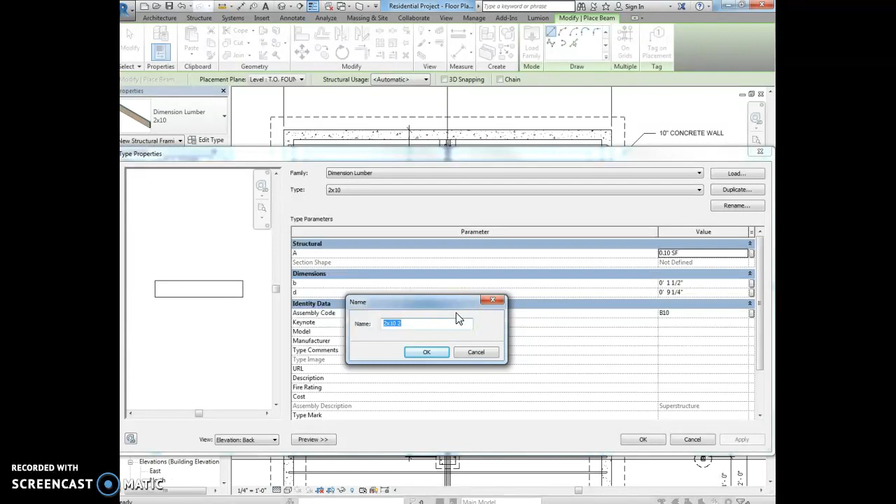Okay, so we're almost there. Now what we need to do is create a sill plate and a rim joist. So we're going to go to beam. We are going to select the 2x10, edit type, duplicate, and rename it 2x8 sill plate. And I know it's a 2x8 sill plate because I looked at the section drawing and it says right here 2x8 sill plate.

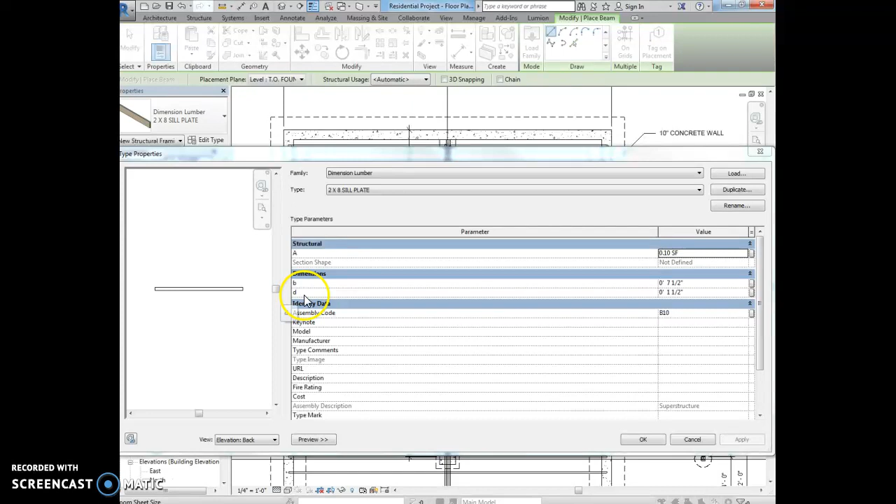Alright, so now to make the sill plate show up properly in the drawing, we have to change the B and D dimensions. So the sill is going to be 7 1/2 by 1.5 inches. Okay, and then we're going to say okay. So this is allowing the sill plate to lay flat instead of putting it vertical.

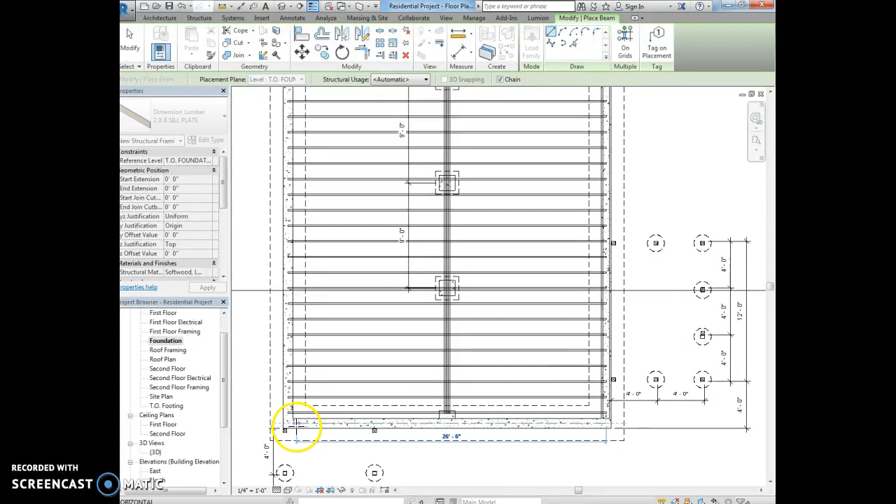Then we have to change the level, so we want it to be attached to top of foundation, and then we are going to draw it on the top of the foundation from here to here, and then I'm actually just going to say chain. Sorry, let's do that again. Delete that one. Do it one more time. Beam, sill plate, chain, top of foundation. We're going to just click all the way around this foundation wall for our sill plate.

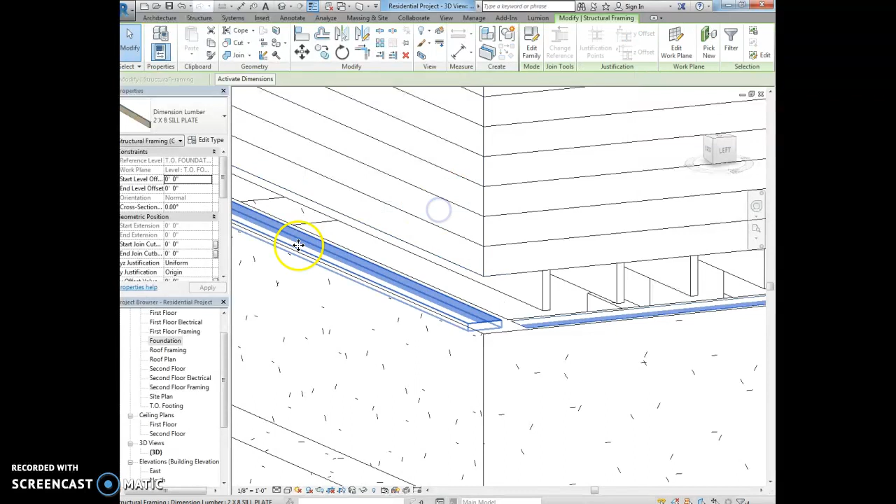Okay, and now we're going to look at it in 3D. So a little bit of a problem here is that it's down inside of the wall, so we need to raise it up. So click on one, right click, select all instances in entire project, and then we're just going to change the start level offset to 1.5 inches, and we're going to change the end level offset to 1.5 inches, and hit apply, and then that pushes them up.

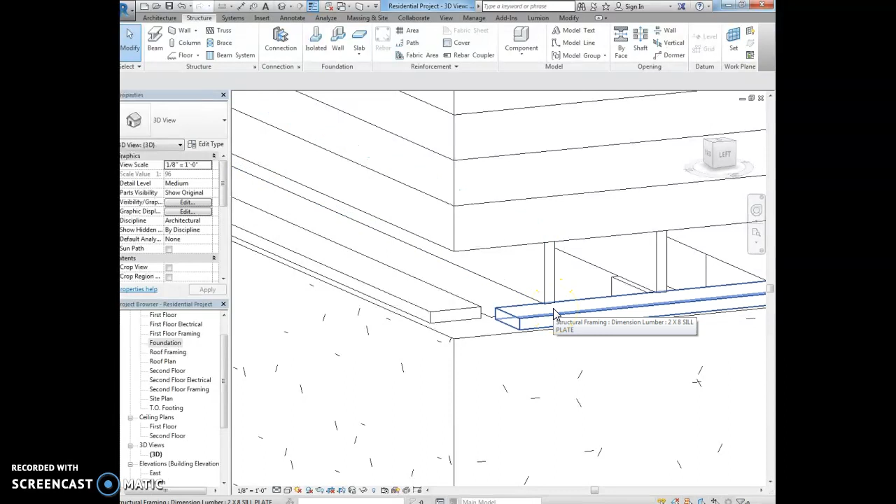So now you can see that things are working out properly. Here's the sill plate, and then we've got our joists, and they're sitting on top of that sill plate, which is exactly what is shown on our section view. We're going to go back to the foundation plan, and we're going to see if we can't get these to connect a little bit better.

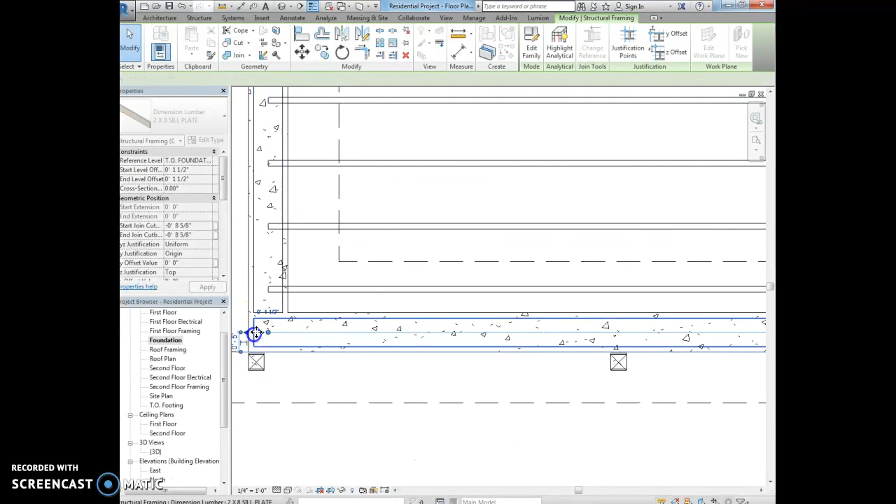Okay, so what we'll do is we will just grab the end of it and use this arrow. We're going to pull it over, and then we're going to use the arrow and pull it up. Those will make all those sill plates connect, and we're going to do the same thing down here. Click on the sill plate, pull it over, click on this sill plate, use the arrow to pull it down to connect. And then, of course, we're going to look at it in 3D, because we have to make sure we did it right. Yes, that looks fine.

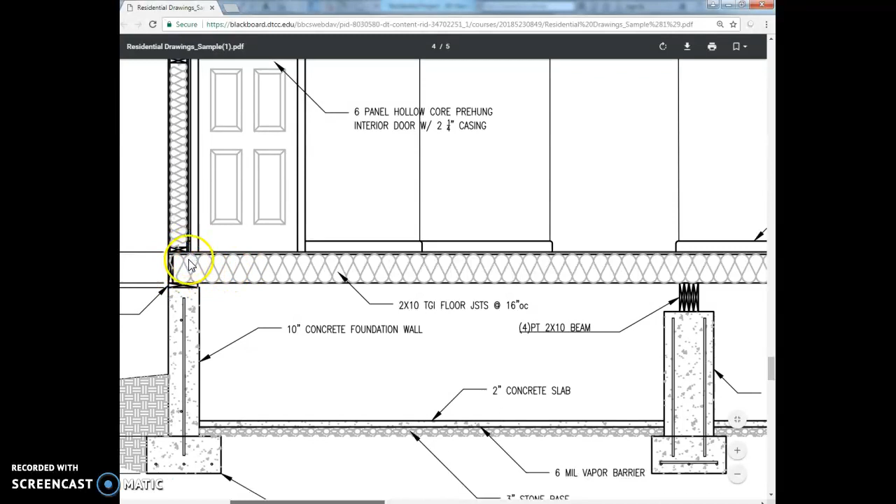Alright, now we need to add the rim joist. So the rim joist, let's take a look at those residential drawings. Some people call this a header joist as well, but it's this. What we just drew was the sill plate right here. It's on top of the concrete. And then this is our rim joist, which is actually blocking the other joists so that we can't see them, right? There's not that giant gap. So we're going to create that next. That rim joist looks like a 2x10.

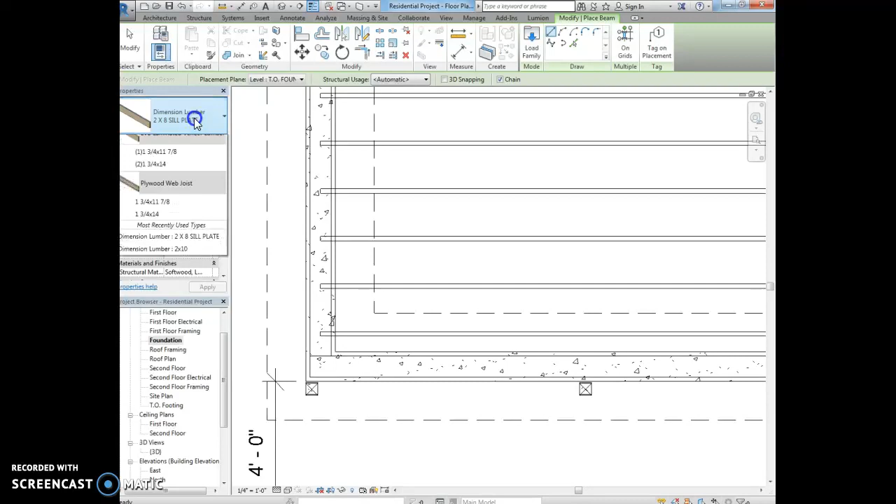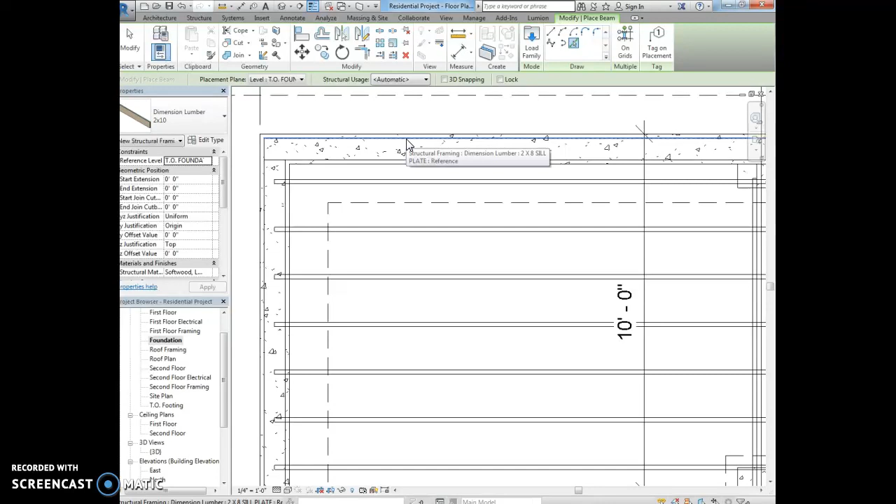So we'll go back to our foundation plan, and we will select structure, beam. We need a 2x10, and then we want it to be at level, top of foundation. And we know that we are going to have to change the start and end level offset, but we'll do that after. And then let's go ahead and draw that. I'm going to just pick walls, and we're going to pick it around the outside of the sill plate. Okay.

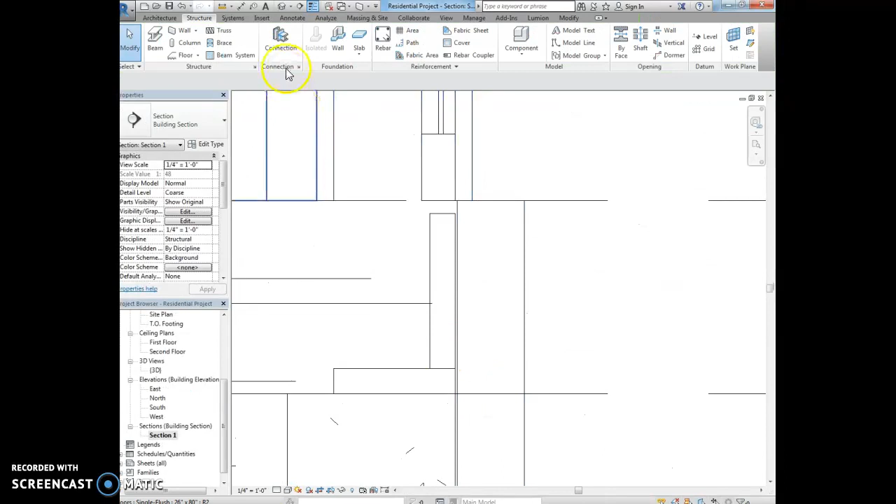And really, we don't have to do all this. I was just trying to show you guys some bonus information. So where did it go? Well, it's way down in here. See it? Okay, so in the 3D view, we found it. It's right here. So I'm going to click on it. And actually, I'm going to go to section view because it's a little bit easier to understand once again. So I'm going to go to the section, and I'm going to compare it to the residential drawing section.

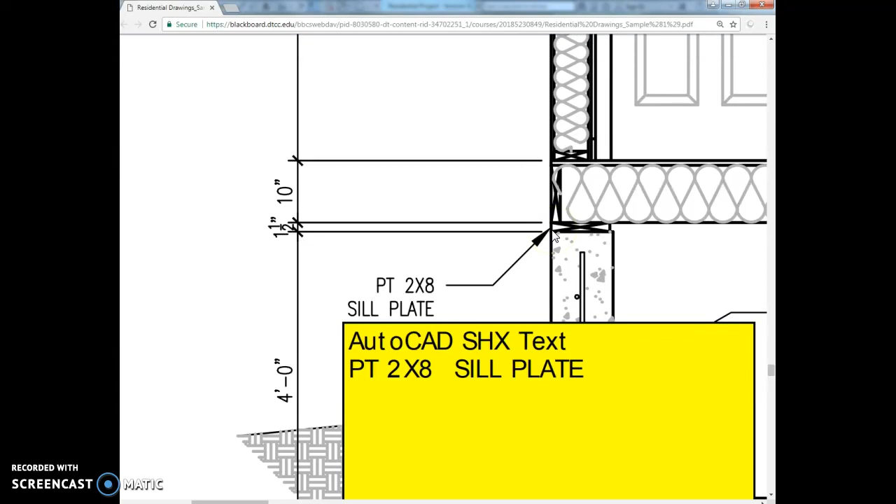So if we look at this, according to this section, our sill plate is at the edge of this foundation wall, and then there's our rim joist. So what we're going to do is I am going to move these elements over and up a little bit. So I have that one moved already, but let's go to this one so I can show you.

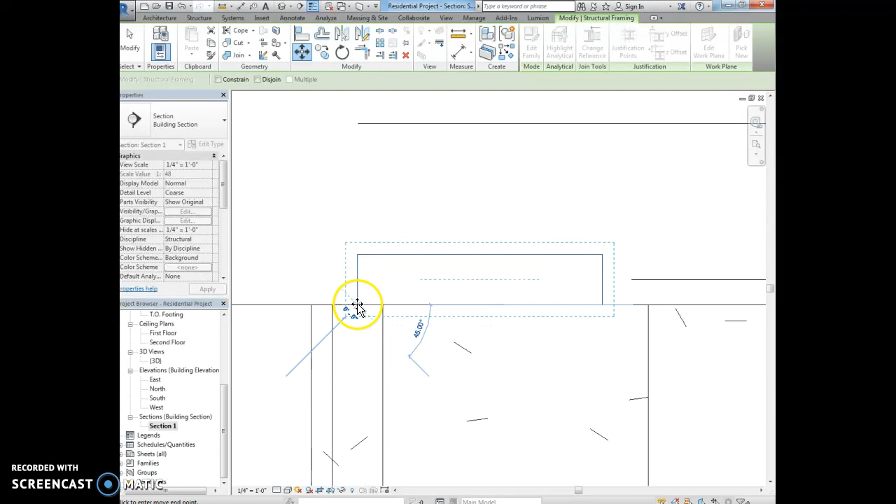So we're going to click on the sill plate. We're going to use the move tool. I'm going to click on the end point of the sill plate, and then I'm going to click on the end point of the foundation wall. Now here's the rim joist, and I am going to move that up as well. So I'm going to click move. I'm going to click on the end point of the rim joist, and then see if it will let me move it up. It may not.

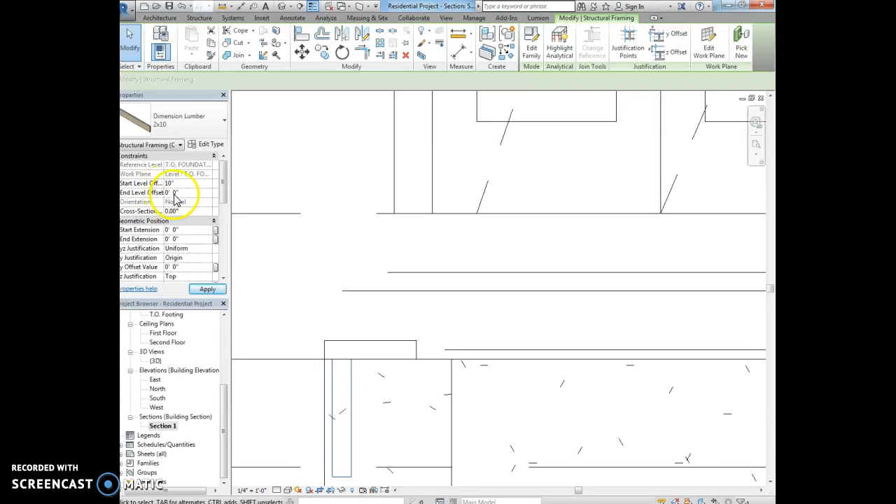Nope. It will only let me move it up with the start and end level offset, and that's going to be, let's try 10 inches. I know that's not what it is, but I just want to show you guys. Sometimes a little trial and error is okay. So now I can move this over, and then let's see if it will let me move it up now. And it does. Okay, so it was 10 3/4.

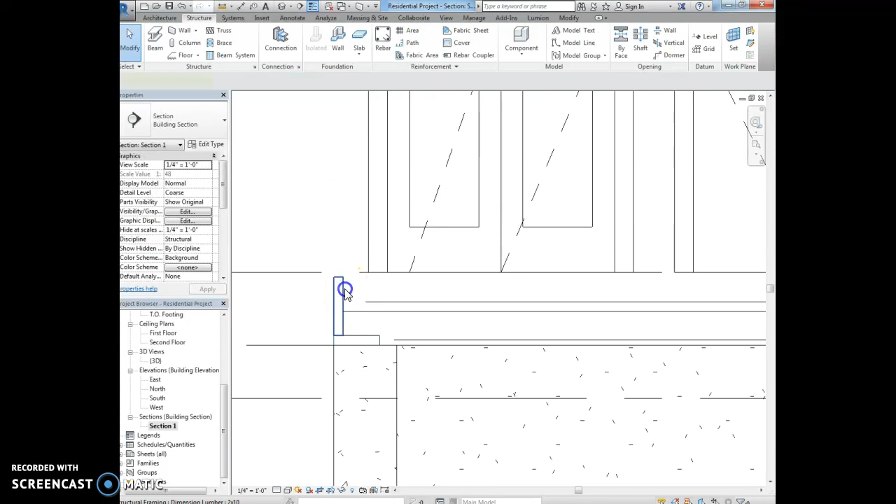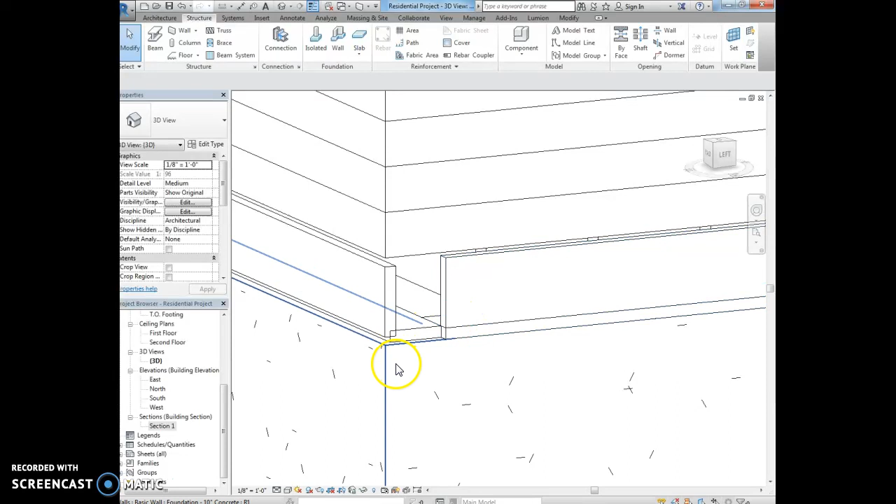Right, so you have the sill and then the rim. And then our joists are running in between. And then we're going to have to make those adjustments for some of our other elements. So let's go through the 3D view again, and let's make sure that we have all of that information set. And again, one of the easiest ways that I find to do this is actually in the section view or looking straight at an elevation.

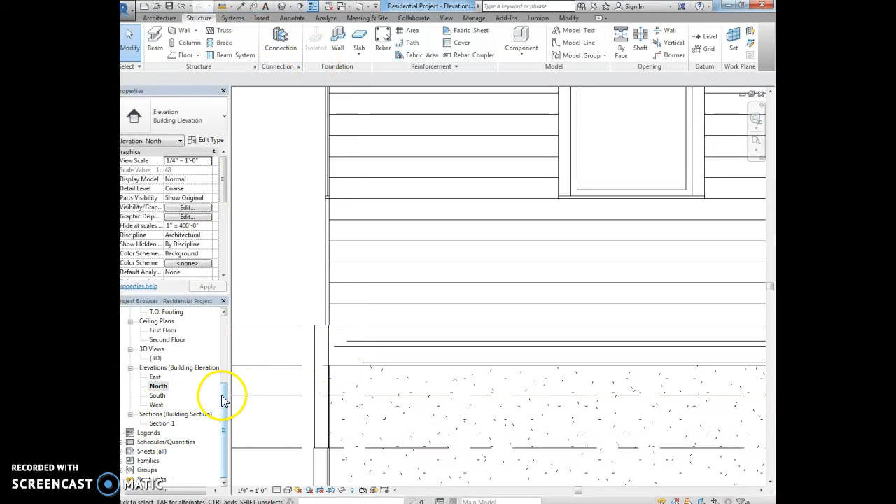So it looks like our north and south elevations need to be adjusted. So I'll go to north. It's a little hard to find my sill plate, so I'm going to go back to my foundation plan, and I'm going to make another section because it's going to help me. So view section, cut straight through the building, right click and say go to view.

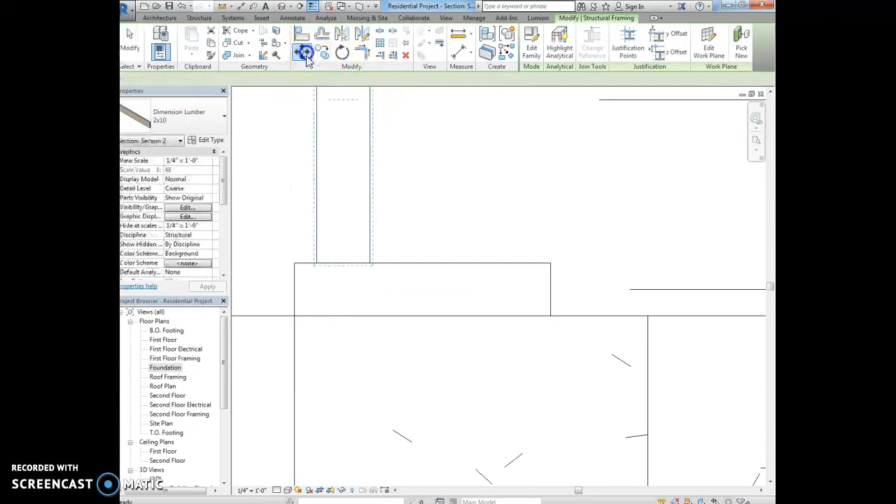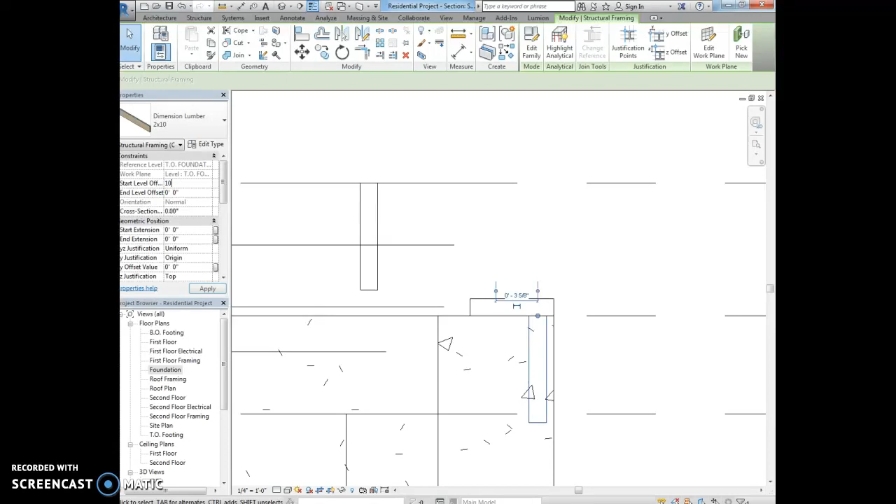Now I can see the sill plate here, so I'm going to move this over, and I'm going to move this rim joist up, and then I'm going to move it over. Okay, it's the same thing on the other side. We're going to move this over, and then we're going to move this one up. Or I'll just simply type 10 3/4 inches and move it that way. Right? And then I'll move it over. Okay, so sometimes you have to work in multiple views to help.

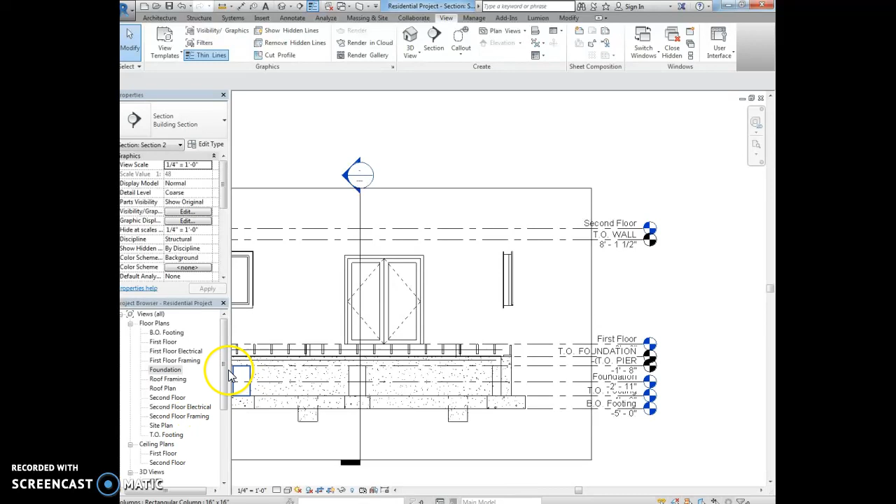I do see that there's a little bit of an issue though. I don't know if you guys caught this, but in this section here, it does appear that our beams are sitting a little bit too high. So they're not sitting at the top of the pier like we originally intended them to. So I'm going to see if we can't move these down. Yeah. But I'm not sure it actually moved the other end down, so sometimes they do this weird sloping thing that you can't really see until you look at it again in 3D view.

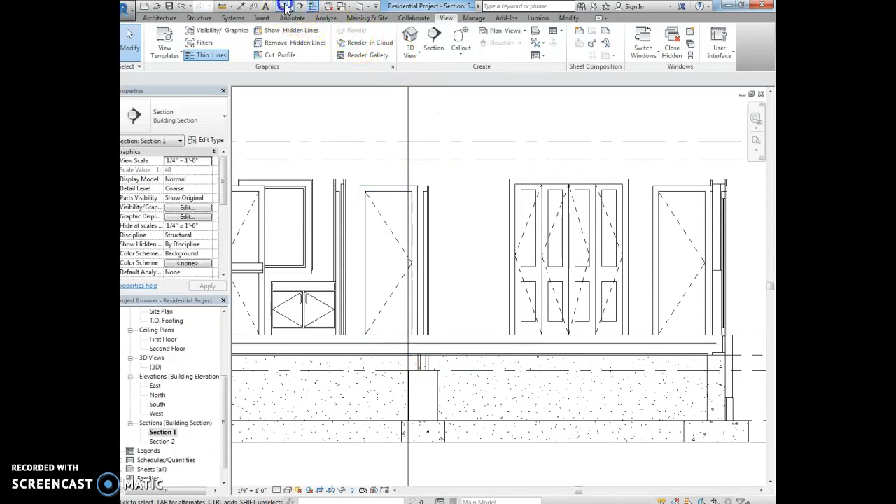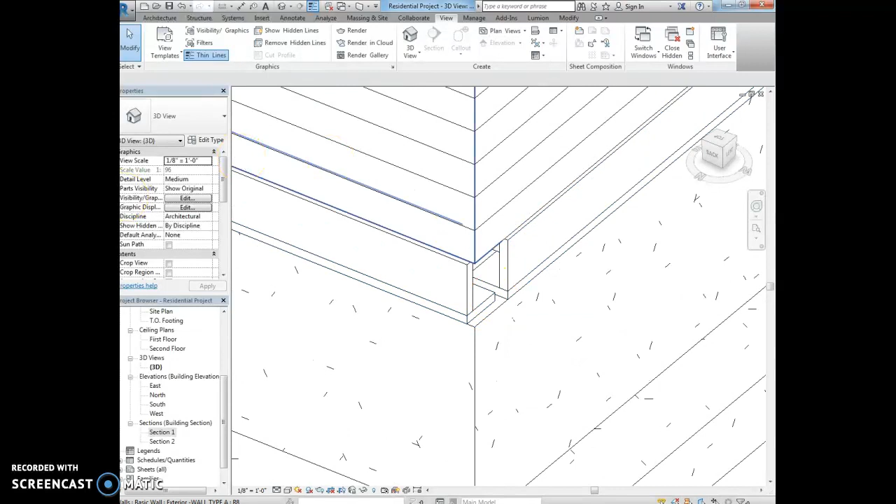So I'm going to look at it in 3D, and I'm just going to see if it's sloping on the sides. So it says that it's at -1'-8" for the whole group, and it appears to be fine, so I guess we moved the whole thing. Alright, so now we have the sill plate, we have the rim joists. They're not connecting anymore, so we need to go back to our foundation plan and edit that. So go back in, and again, click on the sill and just pull those together. Click on, pull them together, and click on the rim joists and pull them together, and then click and pull. So do that all the way around the building.

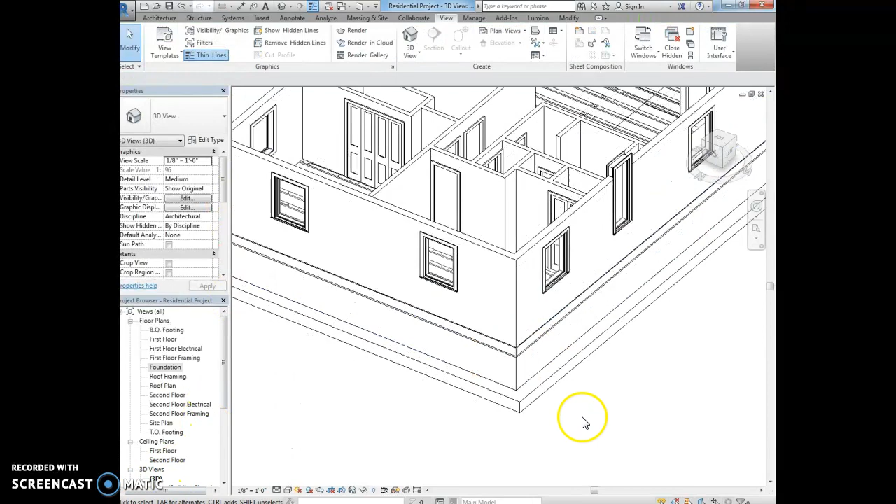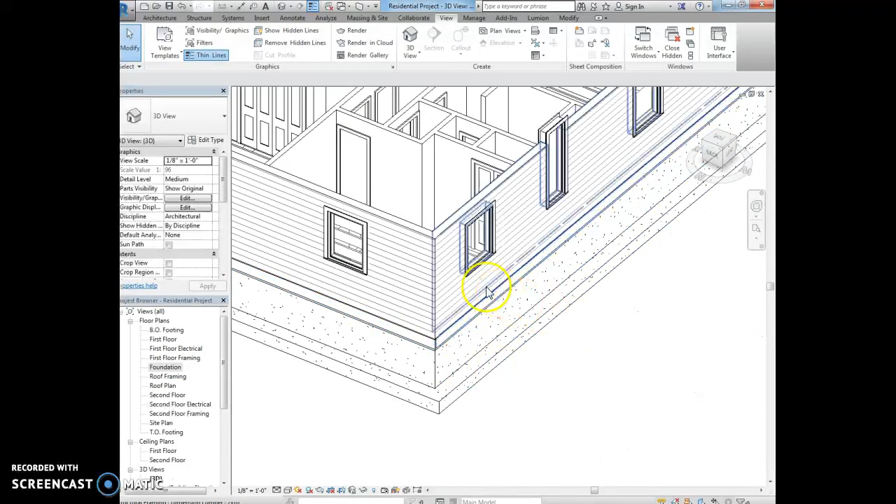Okay, and then once you've finished, take a look at it in 3D, and you can see all your hard work. Now, it does look a little funny still, right? And it's because the building material really needs to come down over these elements, these wood elements. They wouldn't just be hanging out on the side of the house. So we need to adjust that next. So what we're going to do is we're going to click on the wall, and we're going to edit the type.

If you take a look at your textbook, it actually reviews this. Exercise 2-3 on page 2-11 in your book reviews this next part that I'm going to show you.

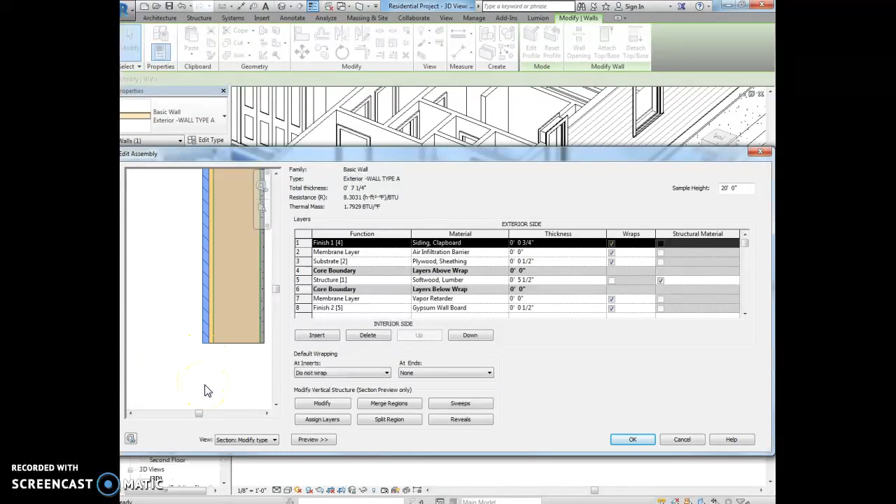What we need to do is pull that siding layer down past the rim joists and the sill plate, because we don't want to see those from the outside of the building. So we'll look at the section, hit modify, click on this bottom line of the siding, and unlock it. Now that we have that done, we'll say okay, and okay again.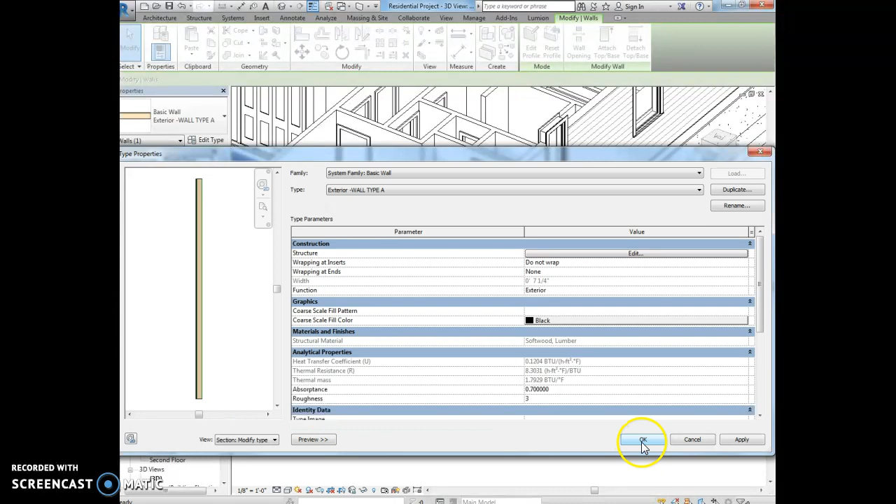What that allows us to do is, if you're clicked on the wall, you'll see an arrow pop up, and that arrow will allow you to pull just that siding down. Sometimes this is easier to do in an elevation so you don't accidentally pull the wrong thing. Click on that, and then pull this down.

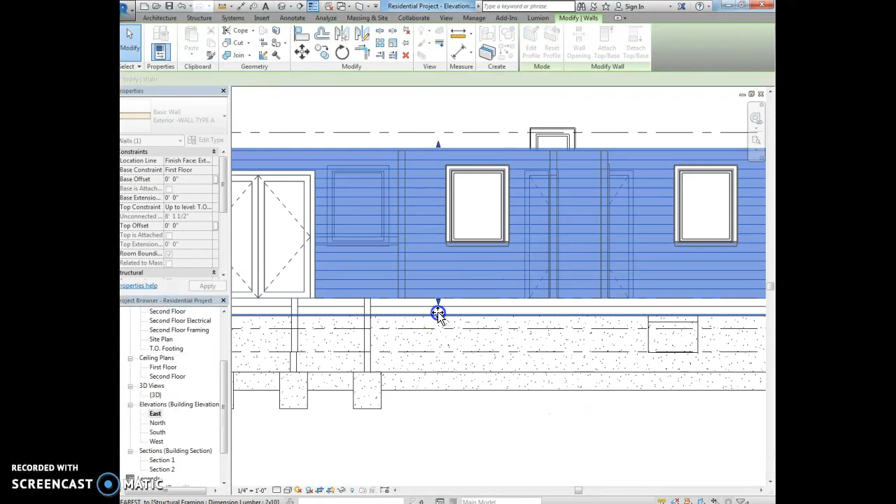Pull it past the rim and the sill plate all the way down to the top of foundation, and then take a look at it in 3D. Oops, sorry, that's the wrong side. You'll see that it just pulls the siding down, but doesn't pull the other building components down.

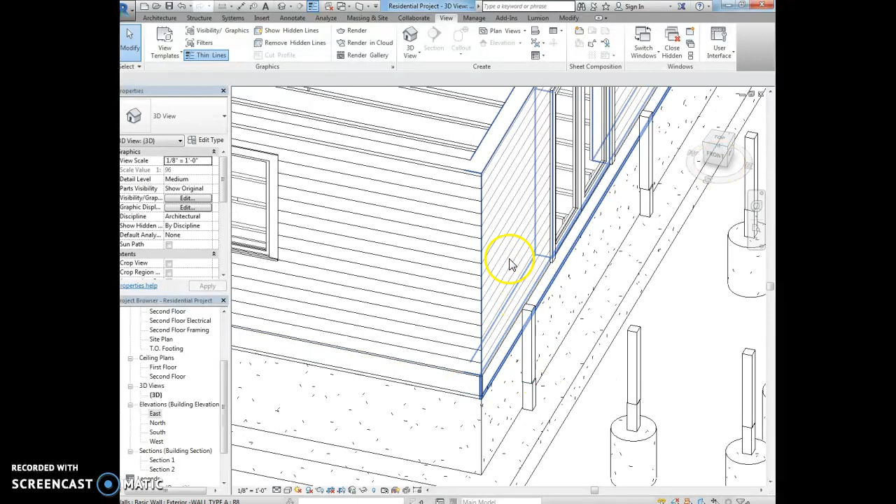Now you'll notice that this joist and all this information is popping out past the wall. So all that hard work you guys just did, we're actually going to have to do a little bit more, because we need to push it back in from the building. If you want, we can do that first.

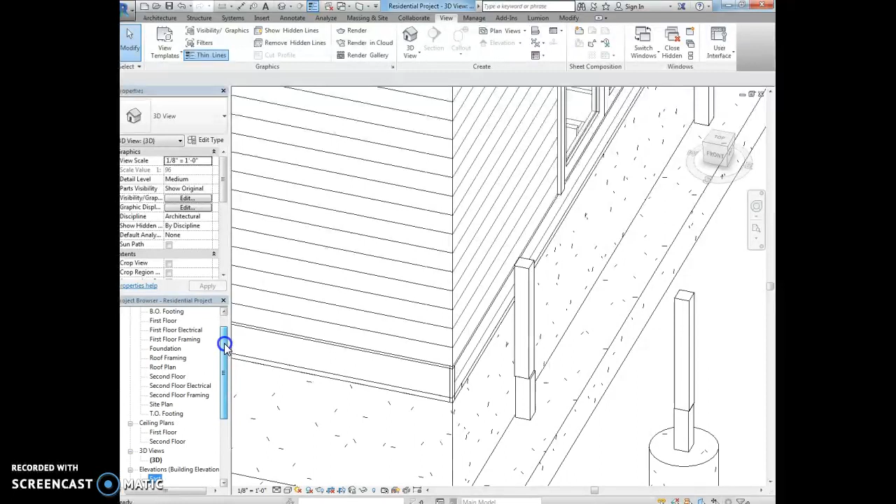What we need to do is click back on this wall type and hit edit type. I'm purposely doing this in an odd order because I want you guys to see that you will draw stuff incorrectly and have to go back and problem solve. This is just how we can show you those steps.

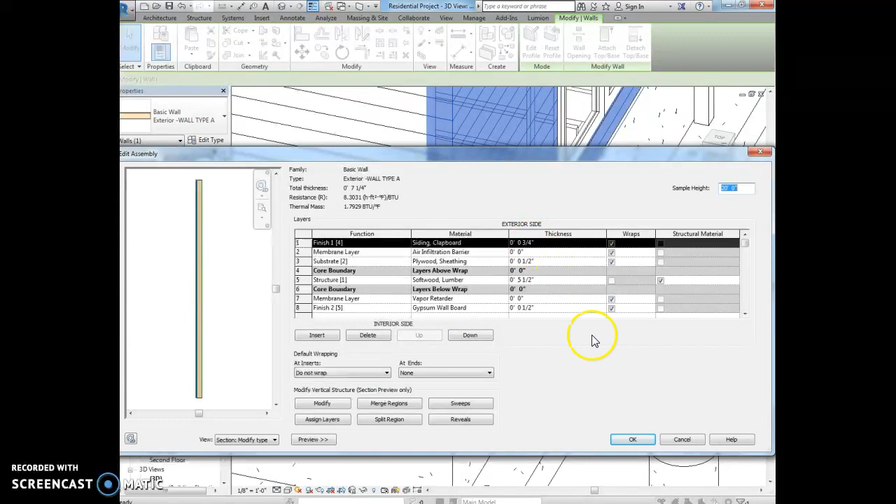If you hit edit, the thickness of that siding is 3/4 of an inch. So on the foundation plan, we want to move the sill plate and the rim joist in 3/4 of an inch. I'm going to click on both of those, click move, click on the end point, and just type 3/4 of an inch and hit enter.

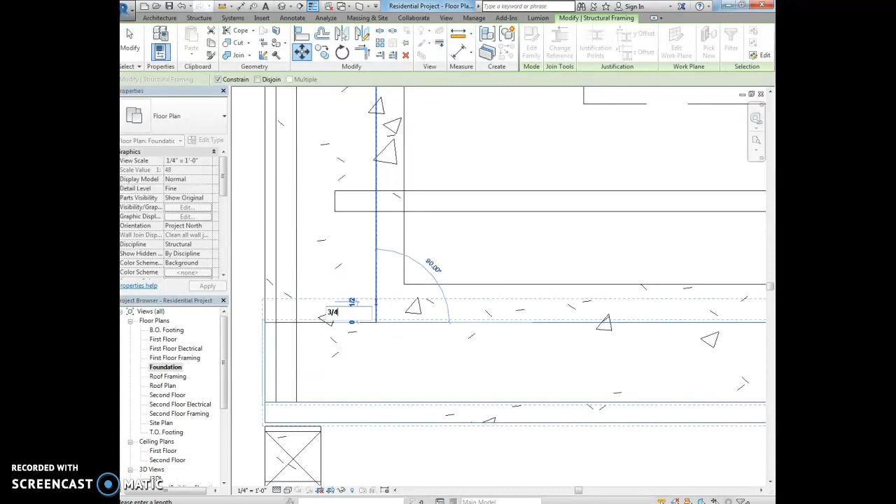I'm going to do that all the way around the building: select both, select move, and type in 3/4 of an inch. And then, like before, we'll have to remodify all this stuff to connect properly, and that's okay. I won't take the entire video up doing this, but make sure you guys go and move all that stuff 3/4.

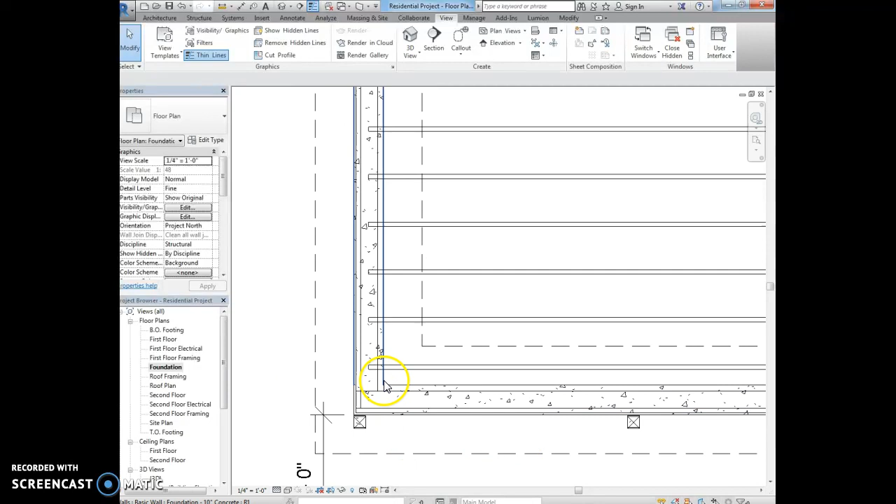Now you can see that after I did that, when my siding comes down, it actually just looks like siding, and I can't see any of those structural components. So we'll do that for each view.

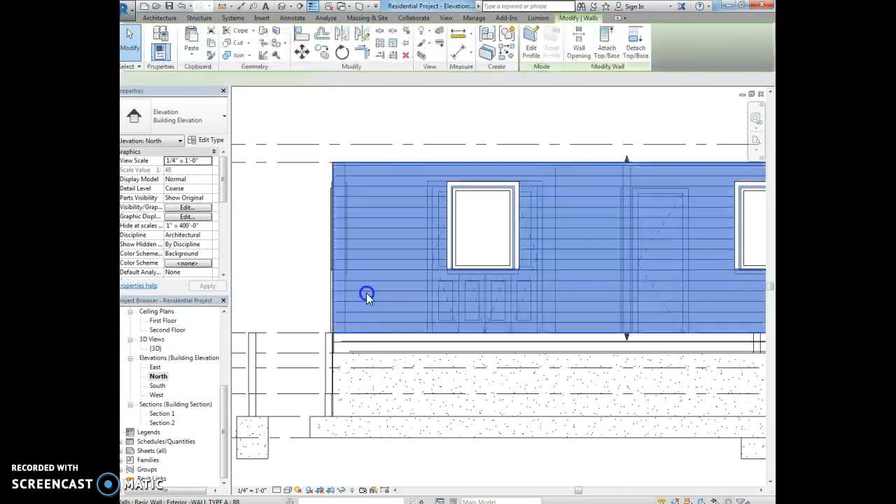We'll go into each elevation. I'm going to go to east — I already pulled that one down. We'll go to north, click on the siding, pull it down. We'll go to south, click on the siding, pull it down. Then we'll go to west, click on the siding, and pull it down.

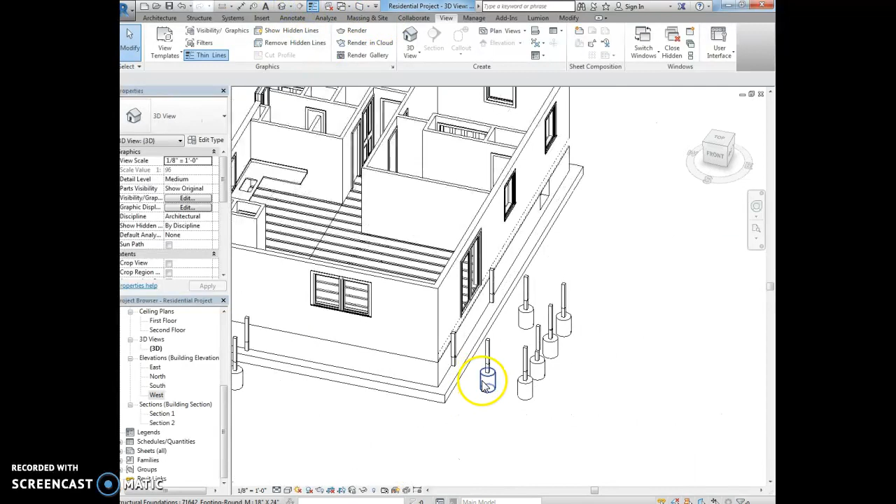So now if we look at it in 3D, you can see that the siding goes down to the top of the foundation on all of those sides. Obviously, like in real life, we're going to have to consider grade and some other things like that, but for this instance, this is good.

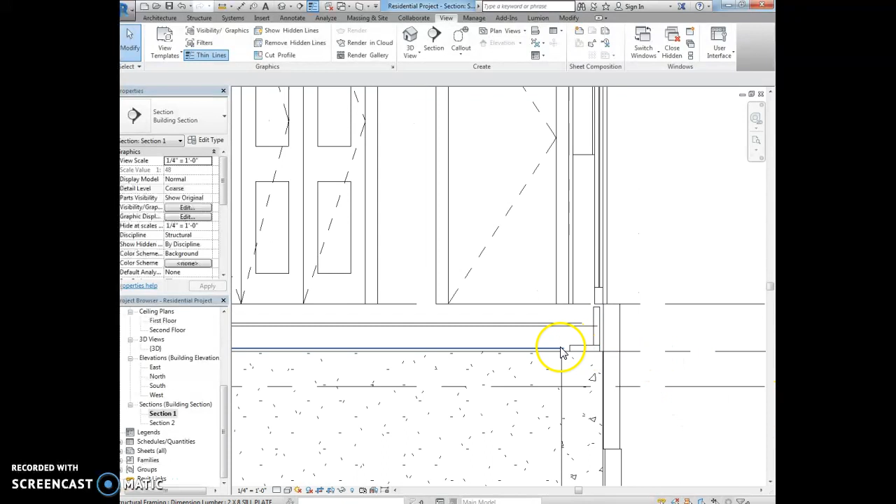You guys are showing some great information. So we'll go back to section 1, and you can see in section there's our foundation wall, our sill plate, our rim joists, and then our beams, our pier, and our joist running through here. We'll make some more modifications to this section.

For now, you have a great start at actually constructing the foundation and getting all the components that you need within the building. The next video that we create will review adding a roof to your structure, and we'll also go over some of these things in class.